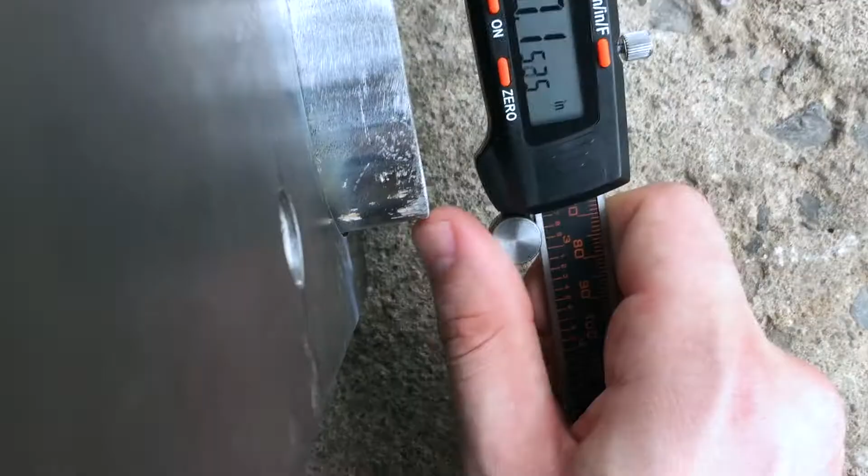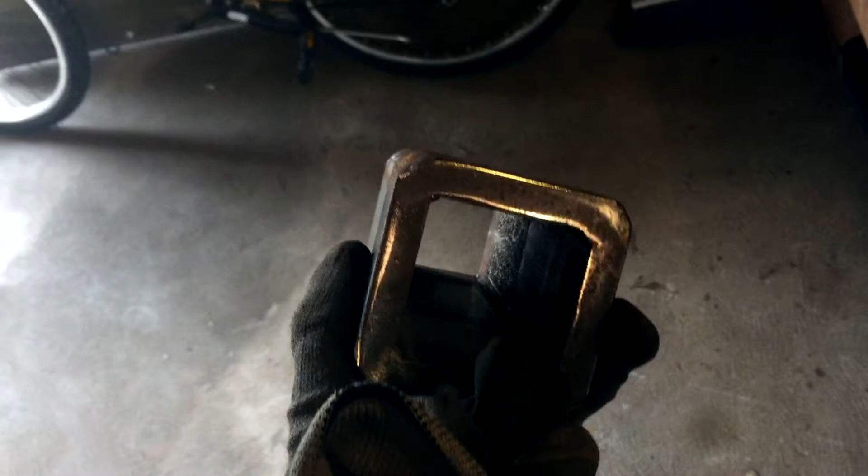Alright, so I'm making a hitch for a camper, a travel trailer. Got some material here that I'm going to use. I've got this 2.5 inch pipe, about 1/8 inch wall. I wish I had something thicker, but that's what I got. And I already made this receiver a while ago, I think it's just 1/4 inch, and then I welded some thicker pieces on the end for some reinforcement. So I've got that. Let's see how this goes.

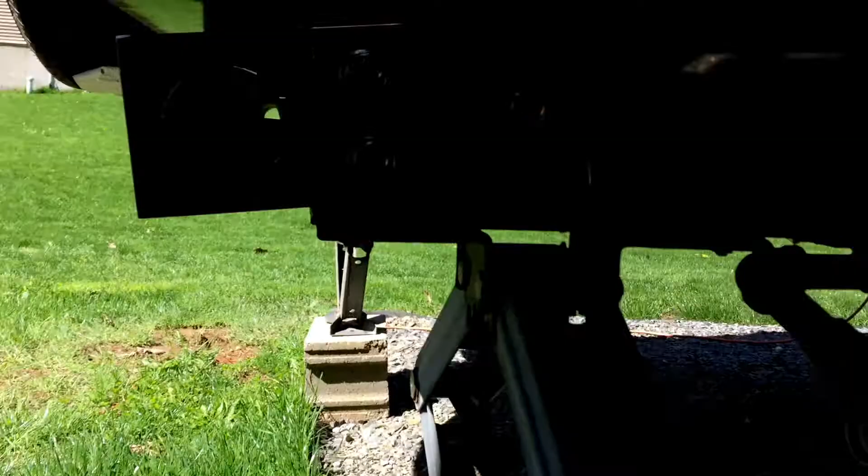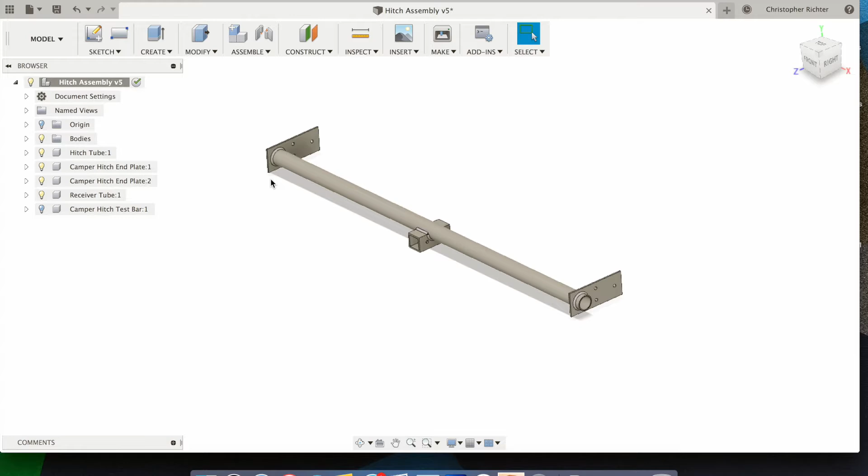Alright guys, so I did a quick model up in Autodesk Fusion 360 here, and I put in our tube diameter and the thickness to see if it'll hold the weight I want it to hold. So I created a little test bar here to put some pressure down on it to see what kind of stresses and displacement we can get out of it. So I ran a quick simulation, and I put 500 pounds on the end of this bar to see what kind of outcomes we get.

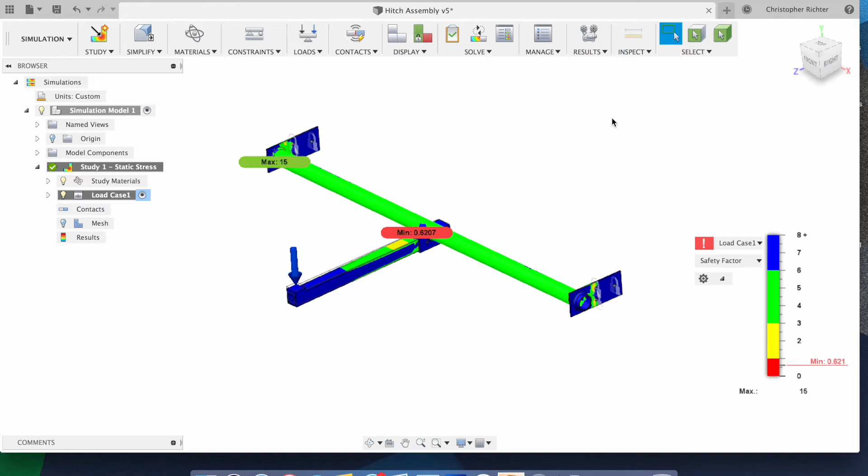So we can see that it has a safety factor, that's what we're looking at now, of 0.62, and what that means is if it's below 1, it's expected to bend and plastically deform. There's a difference between plastic and elastic deformation, so it's going to plastically deform if we put 500 pounds on the end of this. But it's only going to do it in a tiny little space.

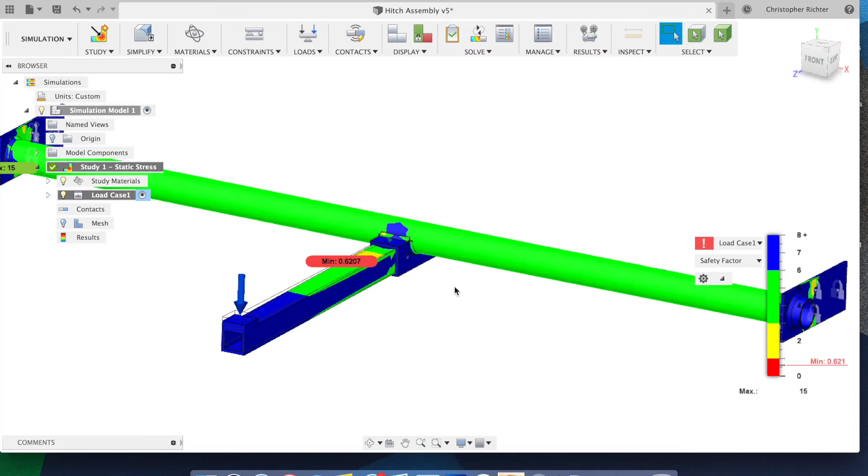So basically, anywhere where there's red, it's expected to deform. You can see that it's only in this tiny little spot over here, maybe around this weld here. So basically, that's just telling us it's going to bend. Doesn't mean it's going to break, but you can see the rest of it here is basically good. We have a little yellow here, but that's still in the 1, 2, 3 range, which is totally fine. And the rest of it is expected to do pretty much just fine.

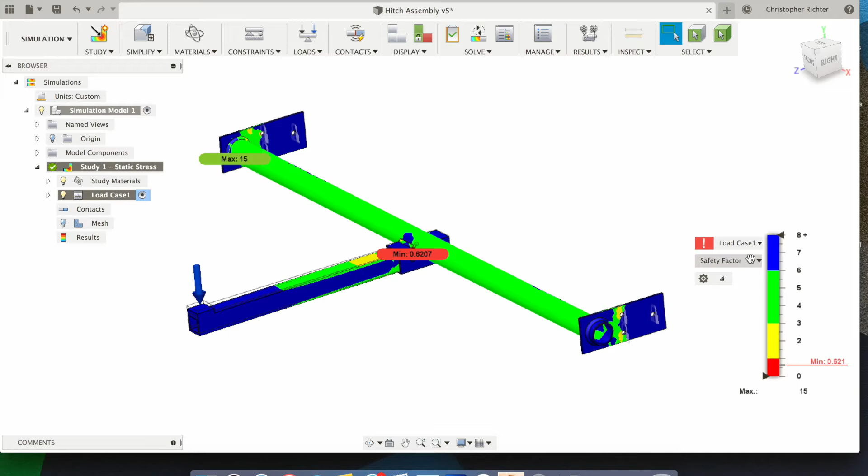And that's with 500 pounds on the end here. I'm pretty happy with that. You can see, actually we can check the displacement on it too. So if we change this to inches, we can see that this whole pipe is only going to move about, gosh, not even 0.1 inches, with 500 pounds on the end of it. So it's not even going to move 1/10 of an inch. But down here it's going to move about 0.33, 0.34 inches down, and that's 2 feet out, I think, from the center of this pipe.

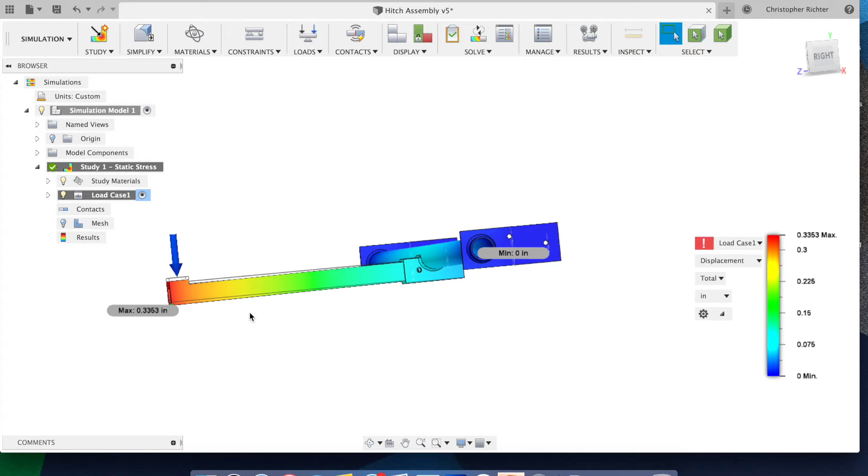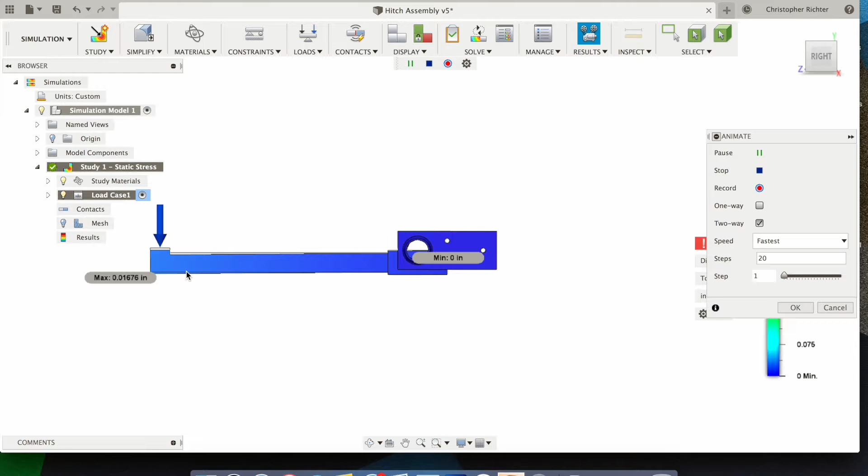It's about 2 feet. So that gives us the displacement, and what's kind of neat is you can actually animate this, the results beginning, so you can kind of see it as the load is being put on it. If you look at the right view here, I will adjust the scale at which it's actually bending. So it doesn't actually bend this much, this is just to give you a better idea of where it's bending. You can see the pipe, it's kind of bending down here, kind of sloping downward as the load is applied.

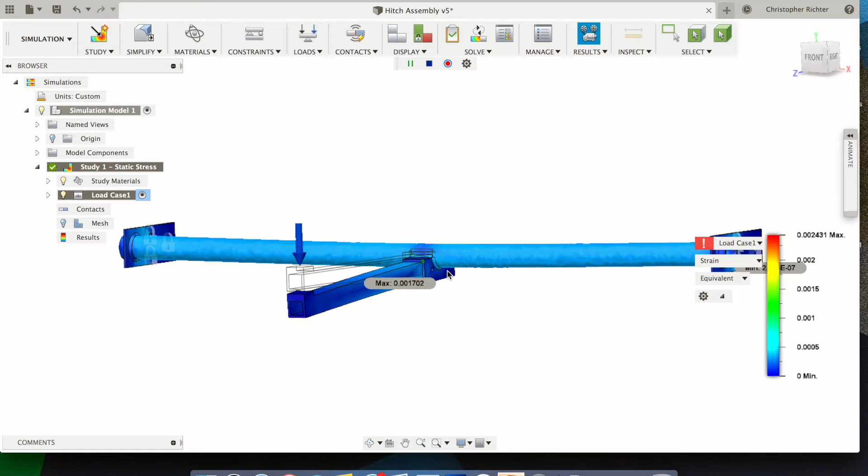We change the displacement and we look at strain. Stress builds up around here and kind of in here. So basically what this is telling us is we need to reinforce this a little bit here. I think I put 1/4 inch welds on here, so we'll double up on the welds. I'll put a little reinforcement in here somewhere, and it should be totally fine. I don't expect to put 500 pounds, 2 feet away from the hitch, it's for cargo carriers and a bike rack or things like that you would put at the end of a travel trailer. So, alright, let's get back to it.